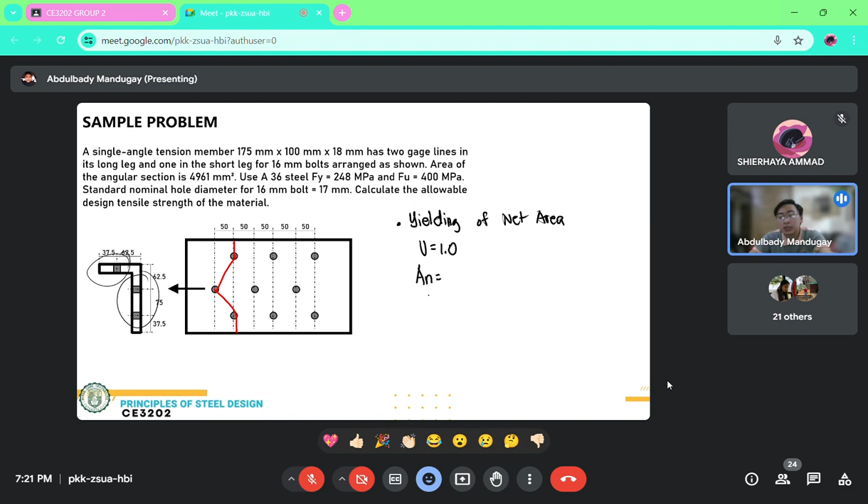So, ang kailangan na lang natin dito i-solve is yung kanyang net area. Eh, meron na tayong dimensions. That is 37.5. Ito lang naman yung importante. 37.5. We have G is 107. And then we have 75 and 37.5.

Okay. So net area natin is net width multiplied by thickness. So we have net width natin. Ilan ba yung total nito? 37.5 plus 107 plus 75 plus 37.5. That's 257. So that's 257 minus, since inassume natin na failure pattern or failure route is this one, yung nakikita yung red line. So minus tatlong effective diameter.

Ano ba yung nominal hole diameter ng 16 mm bolt? 17 mm daw. So 17 plus 2, that will be 19. So minus tatlong 19 plus, okay, mag-s squared over 4g tayo dito ng dalawang beses kasi magkaiba sila ng g. For this one, ang kanyang s is 50. Ang kanyang g is 107. Plus, for this one naman, ang kanyang s is 50 at ang kanyang g is 75.

Kasi yung mga previous na sinasolve natin, equal yung s and g niya, kaya minumultiply na lang natin ng 2. And then times thickness, anong thickness natin? That's 18 mm according to the problem. Okay? So net area natin, that is 257 minus 3 times 19 plus 50 squared over 4 times 107 plus 50 squared over 4 times 75, multiplied by 18, that is equal to 3,855.14 square millimeters. This is now our AN. And itong AN natin na to, this will also be our effective area since ang U naman natin is 1. So 1 times AN, that is equal to AN.